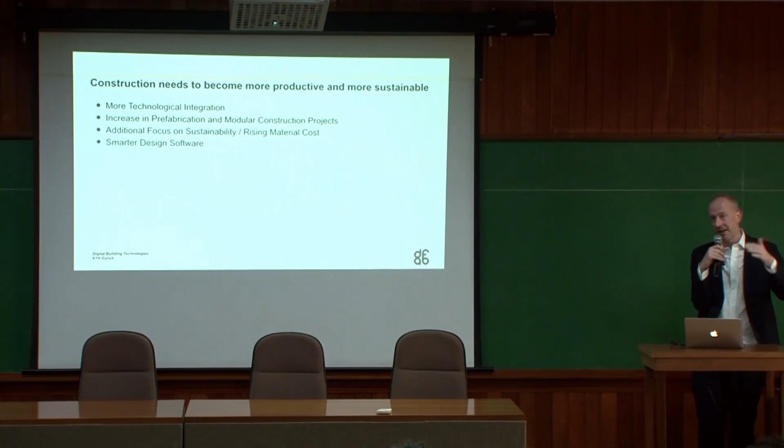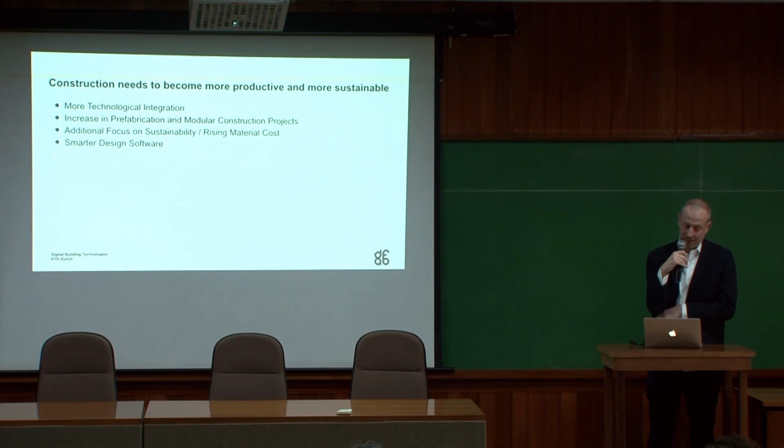So these are central aspects framing our research. We will have more and more technological integration into buildings, so we have to find the right way to do that. In order to answer the increasing demand for housing, we need to increase the amount of prefabrication and modular construction. This doesn't mean that we should build standard houses, but we still have to think in prefabrication. And of course, we have to put an additional focus on sustainability, which will also come together with rising material costs that we need to be prepared for. And as was already mentioned before, smarter design software, BIM, will become more and more relevant.

And I would now like to show you a little bit of the research that we do in the field of digital fabrication and computational design, more the experimental research work, and then go into detail on a house that we built together with colleagues, the DFAB House, to show you what impact it can have.

So that is the scope of our research. We call it the digital process chain. So we seek for processes that start digitally in the computer as a design and stay digital until the end of construction. One part of it is, of course, digital fabrication. And one very simple, naive question could be, can robots build better houses?

If you look at car industry, and that is part of the increase of productivity there, it's already very much automated. But these machines are more smart than just building always the same cars. So they could also potentially build very individual houses. And Vanderlei already showed the robotic fabrication lab. That is why we have this infrastructure to test how robots could build buildings in future.

And here the special setup for us is also a large 3D printer, because it actually has 40 meters by 12 meters print box size. But 4 robots can also work together for complex tasks, if you want to handle complex geometry, but they can also work together with humans next to each other. So that's a very important aspect. It's not that robots will completely remove humans on the construction site, but people will work next to robots.

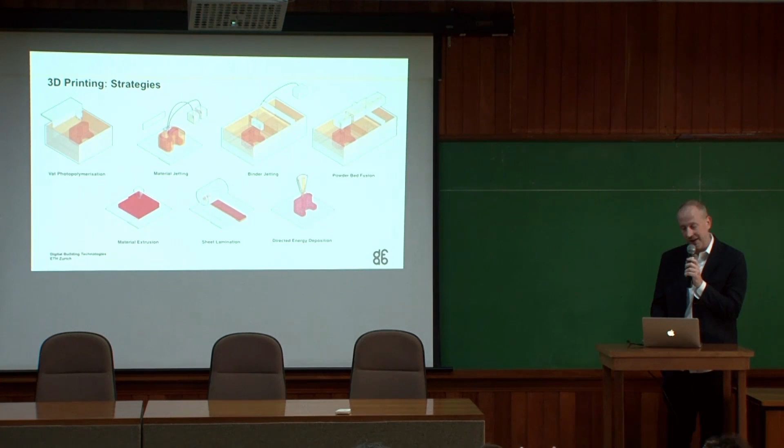When we work with 3D printers, we don't work with the small-scale printers that you probably know from architectural offices. We work with very big machines. This is one of the biggest industrial printers. It can print sandstone. So it would bind sand particles with binder. And the print bed of this printer has already the dimension of roughly this screen here, 4 by 2 by

1 meter. But what is very specific about this fabrication process is that it has a resolution that is roughly 50 times higher than this screen. So it's 40,000 by 60,000 pixels. And this machine can print, no matter what you put in as geometry, in always the same amount of time. So no matter if you print just a box or a highly complex part, it will always take the same amount of time. Actually, 1.5 days for one print bed.

Originally, this is developed, and that's about combining things again, for a very traditional 2,000-year-old manufacturing process, the casting process. So you can 3D print molds and then cast metal inside. We did this here together with the students where they developed a parametric mold system for custom joints. 200 of them. They would cast the joints and then fabricate this pavilion out of it.

That is, for example, now a combination of tradition and modern technology that is still up to 200 times cheaper than directly printing the joints. Students also developed this facade with the same principle, out of aluminium.

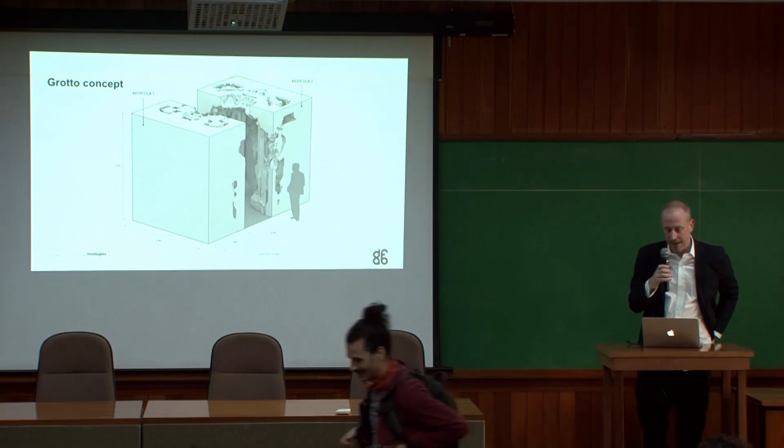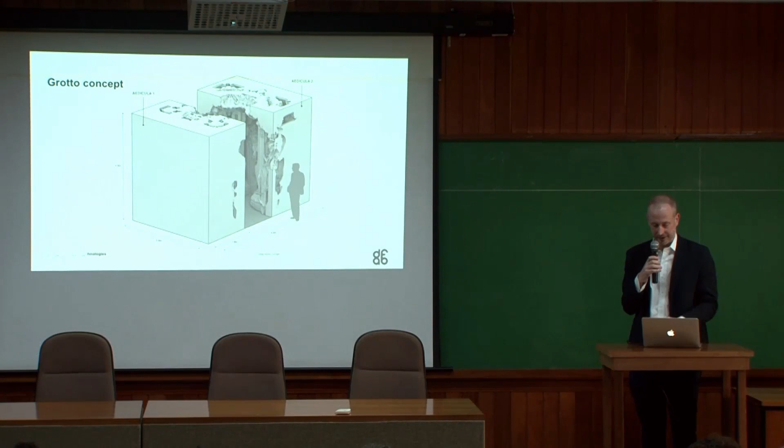So the first project that we ever 3D printed for real was this project Digital Grotesque for the Architecture Museum, Centre Pompidou in Paris. Here you see the entire spatial configuration. It's called a grotto because it should showcase what happens if architecture and nature are merged together. And these are design studies that we created based on this process.

But what is new when we work with computational design and 3D printing is that we can design fully in 3 dimensions. So we don't need any 2D plan anymore to draw, but also to communicate our design. Ideally, we can fabricate without adaptation. So we don't need to, for example, rationalize our design after the design process, because the machines can handle this complexity. We can also fuse structure and ornament, for example. We can have more integrated building components.

Here you see the printing process in action. In this case, it's also a robot, but it's called a Cartesian robot, just a different axis system. And the smartness of this machine is actually the print head. So it can apply binder on the loose bed of sand, and the finished pieces are one-to-one printed sandstone pieces that are entirely swimming in loose sand.

The nice thing about this process is that you can really print sandstone, with similar properties, and instead of carving the material away, you can just select and connect it wherever you need it. You can create hollow parts, you can create undercuts. This is one of the 3D printing processes that has the highest geometric freedom. You can really fabricate things that you cannot fabricate with any other method. And you can recycle the sand that you don't use. So it's also a very efficient and friendly process.

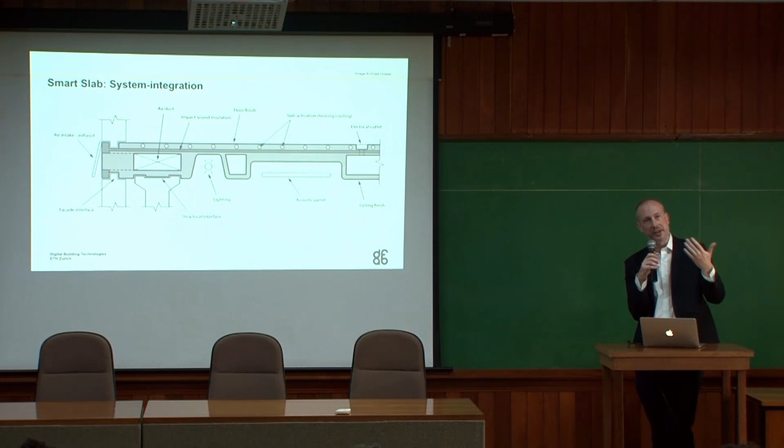But that also makes sense, because actually formwork fabrication for concrete is one of the biggest parts of the work. I don't know if you know the engineer Nervi, for example, Italian engineer, very influential, very fantastic slabs, for example in these buildings. He already pointed out that there are some limiting factors in concrete construction. One is actually our own minds. That's also interesting. So we can also use computers to probably overcome our own minds.

But of course, it's also the formwork system, because we always work just with flat panels for formwork. And again, it's more than 40% of the cost of a construction site. So if we can use 3D printing to take this out of the correlation, we can have a big impact. Let me show you a little bit what kind of design process we imagine for such a slab.

So I'm showing you now some prototypes that exemplify how we imagine the future design of these slabs would happen. We would, for example, define the support structures, analyze the stress so we can find out where we need more material. We turn it into a geometry. We visualize it, so we test how it would look. We send the geometry to a printer. This is the small brother of the big printer I showed. It's just 2 by 1 meter. And we would print the element.

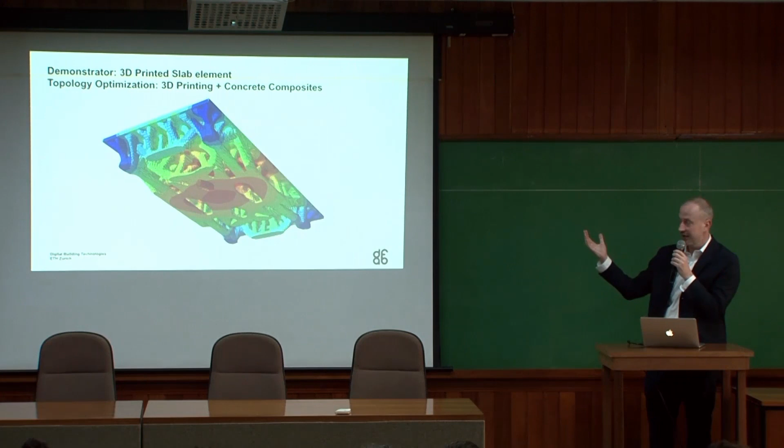We can also start to optimize components fully in 3 dimensions. So you can take out the material where you don't need it. In this case, we optimized again the slab structure, because we thought, okay, how can we reduce the amount of material? And in this case, with the computational optimization, we reduced over 80% of the material by just taking it out where you don't need it. The extra effect is that we also gained some voids where we could have the piping inside.

But also, of course, we have to seriously test the structural capacity of our slab.

So these are prototypes where we already used the 3D printing as a formwork, in this case also fiber reinforced concrete. Thinking about the larger construction of the DFAB House, we have a cantilevering situation and we have to support 2 floors, so we integrated post-tensioning. And we think about 3D printed formwork, prefabricated concrete elements, and bringing them on the construction site. Here you see the layout of the post-tensioning cables that we use to use concrete more efficiently.

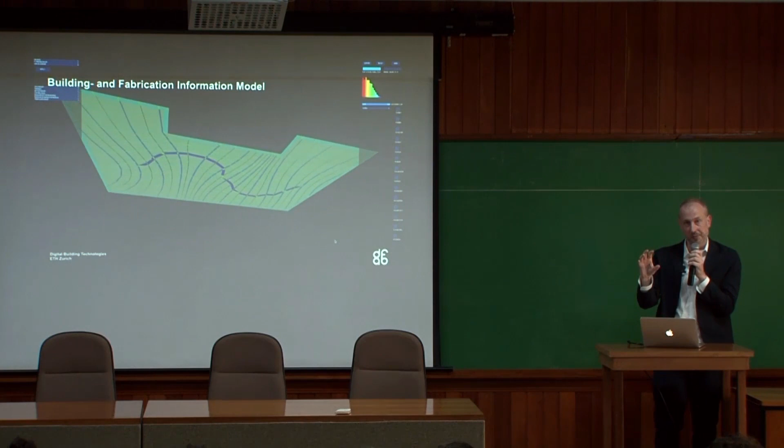And again, as I showed in the small prototypes, we develop our own design software that is able to react to the support case. In this case, it's this S-curved wall. We can control the rib layout, analyze the structure. We can also export the fabrication data from this software. It's a digital process, which also involves different software.

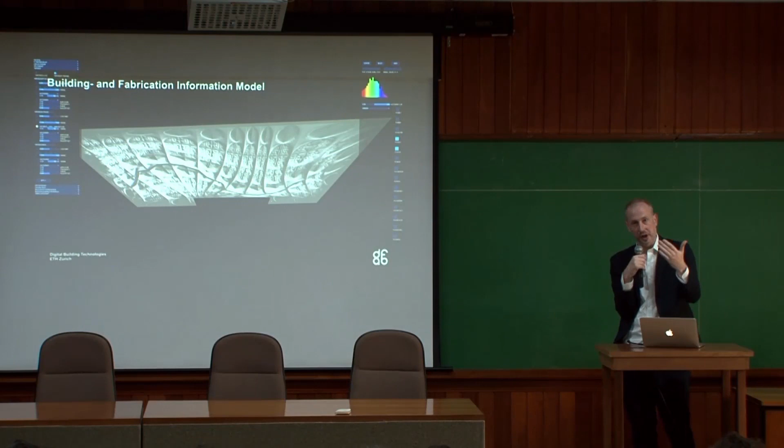But what was, for example, very important in this project: the robot was responsible to construct the wall, and unfortunately it was faster than we expected, so it only needed 2 weeks. So we had to speed up our design, but also it was not very precise. So we could scan the entire construction and then directly adjust our model to the real geometry of the wall to make sure that the components fit. So just-in-time adaptation of the fabrication data.

Here is the rendering of the final layout. So at the end we have a combined digital formwork. For the most complex part we use 3D printing, and that's the underside, what you see here. For the upper part it's a CNC laser cut timber system, because there we have prismatic geometry. So it's important to understand that here many different fabrication methods come together, but they all fit perfectly like a puzzle because of our digital model.

So all the geometry, and it's really 2,000 parts for one single element, including the rebar, the voids, the alignment pins, and all the details. It's a complexity that we usually only know from airplanes or so. But we could organize them all in our digital model, and they would all fit together perfectly. So it's an outlook of future prefabrication, actually.

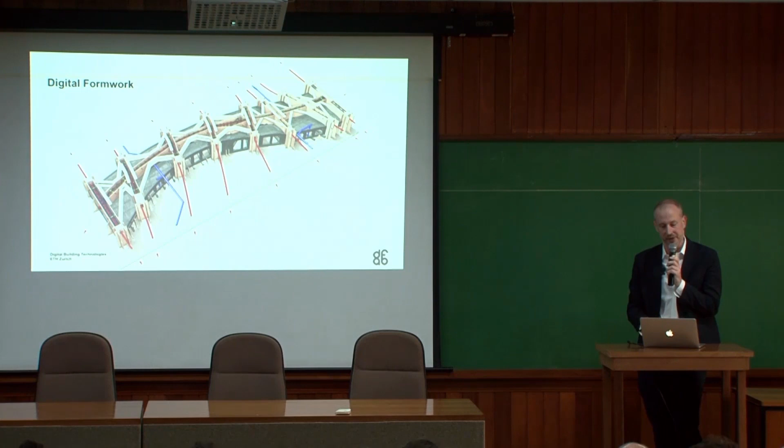You see here the fabrication of the formwork. Again, the same printer. We would just apply binder where the formwork parts are. And of course, when you 3D print formwork, you can also optimize the formwork itself. So we used only 5mm thick formwork with ribs, because for the printer that is no difference. We could print them massively, but that would be too heavy. But we could just make it a very thin shell, just enough to support the concrete.

These are the formwork parts. The alignment on the construction site. So prefabrication. Yeah, it's very sexy when it's glossy and there's a release agent on it.

But we use two different concrete strategies. We use a fiber reinforced spray concrete, wet in wet with a casting concrete. And that allowed us to create very thin shell construction. So on most parts of the slab structure, it's only 20mm thick, as you can see here. And the ribs themselves are 10 centimeters. So also for pre-stressed concrete construction, it's a very small amount of concrete, very minimal.

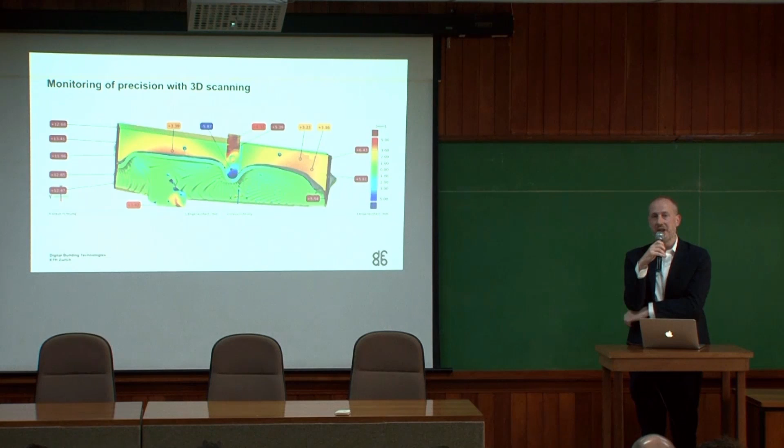We were also able to scan some prototypes, and we achieved a precision of less than 2mm tolerance for 7-meter long elements. So actually, when we had these images on our iPhone, it would identify it as an airplane. It's such a new form that AI doesn't recognize it as a slab.

We could save over 60% of concrete. Again, the digital model was very important to design it, but what was also interesting is that within the process of the Smart Slab fabrication and development, printers became 2 or 3 times faster. So we have to be aware that these are technologies that are evolving very dynamically, and we basically have to predict or anticipate what the next steps will be.